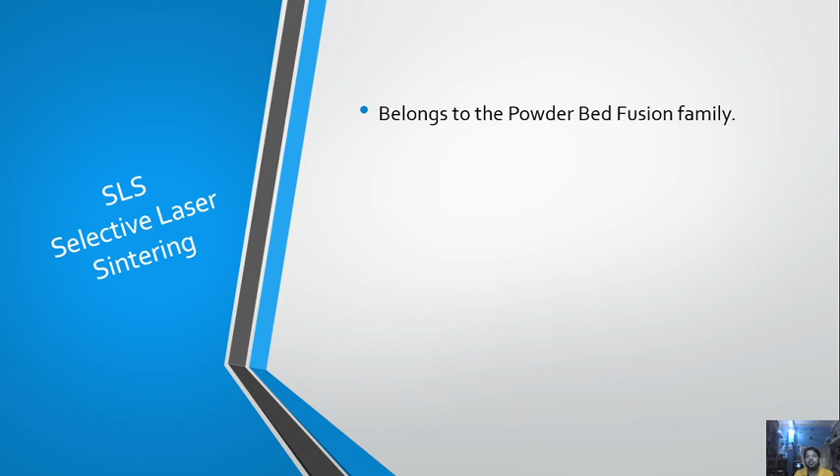So what is selective laser sintering, or SLS? Basically, selective laser sintering is an additive manufacturing process that belongs to the powder bed fusion family. In SLS, a laser selectively sinters the particles of a polymer powder, fusing them together and building a part layer by layer. The materials used are thermoplastic polymers that come in granular form.

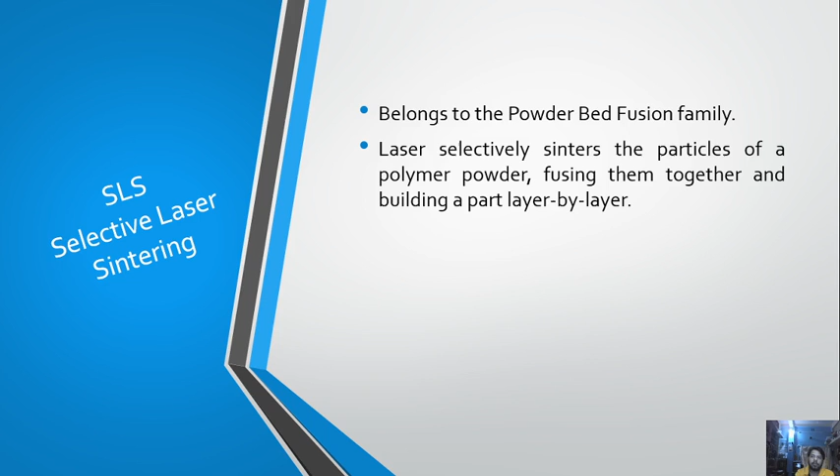SLS 3D printing is used for both prototyping of functional polymer components and for small production runs, as it offers high design freedom, high accuracy, and produces parts with good and consistent mechanical properties, unlike FDM or stereolithography. The capabilities of the technology can be used to its fullest only when the designer considers its key benefits and limitations.

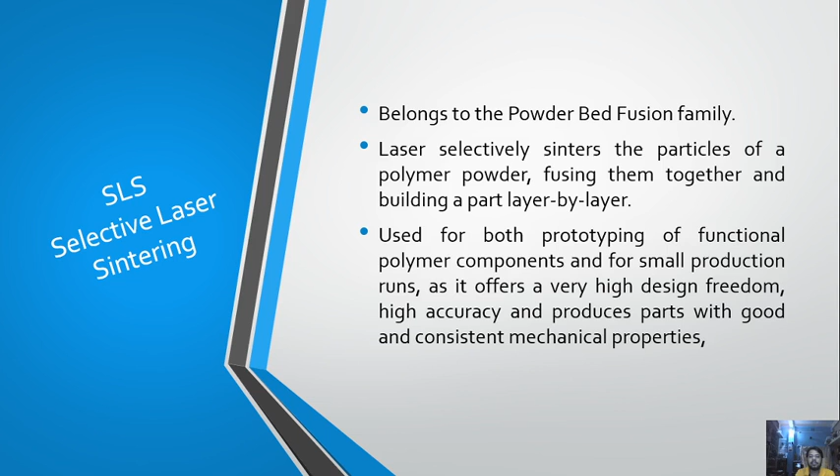So now let's see how a selective laser sintering 3D printer works. You can see in this video how an SLS 3D printer operates.

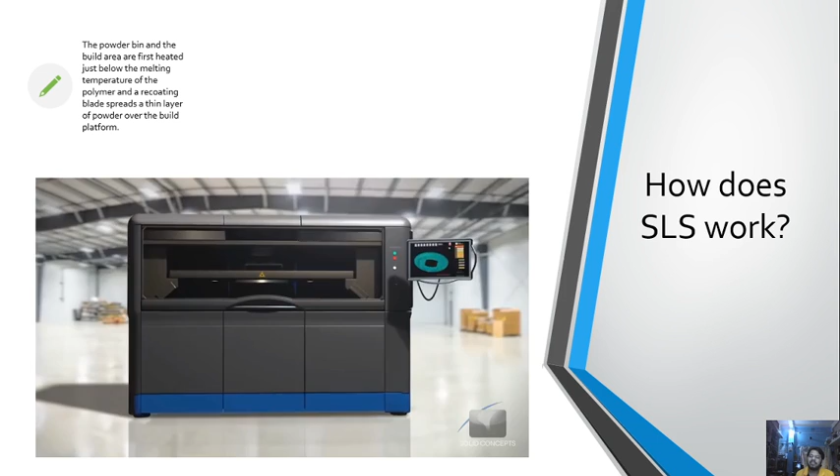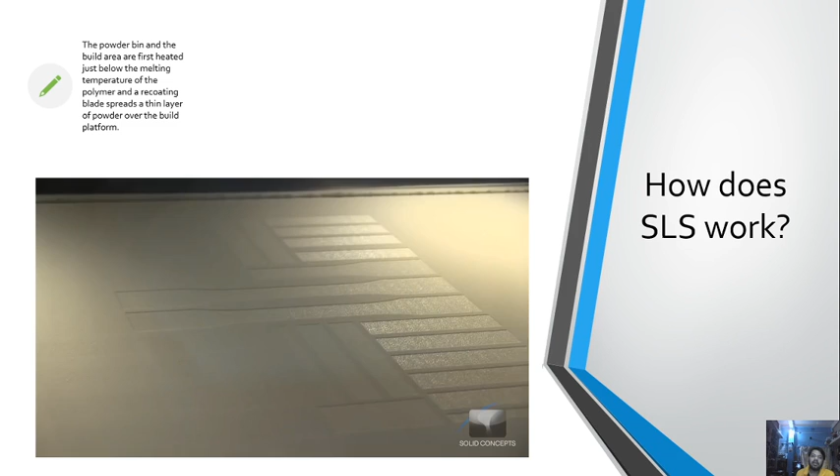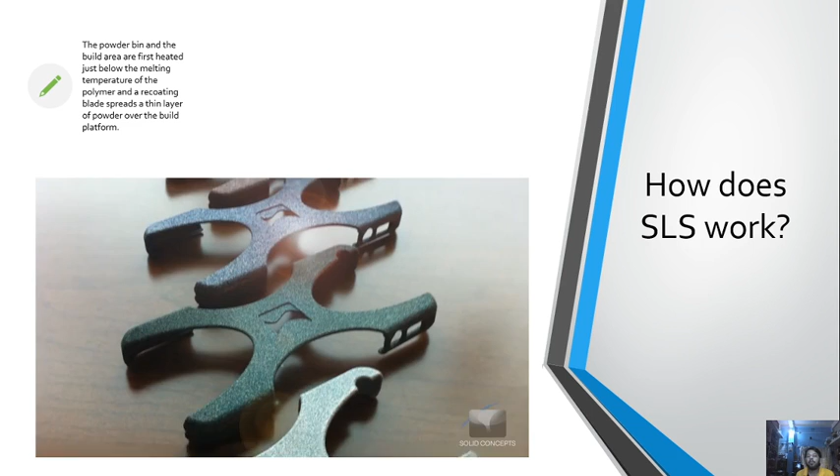At first, the powder bin and the build area are heated just below the melting temperature of the polymer, and a recoating blade spreads a thin layer of powder over the build platform. Then a CO2 laser scans the contour of the next layer and selectively sinters, fusing together the particles of the polymer powder. The entire cross section is scanned, so the part is built solid. When the layer is complete, the build platform moves downwards and the blade recoats the surface, and the process repeats until the whole part is complete.

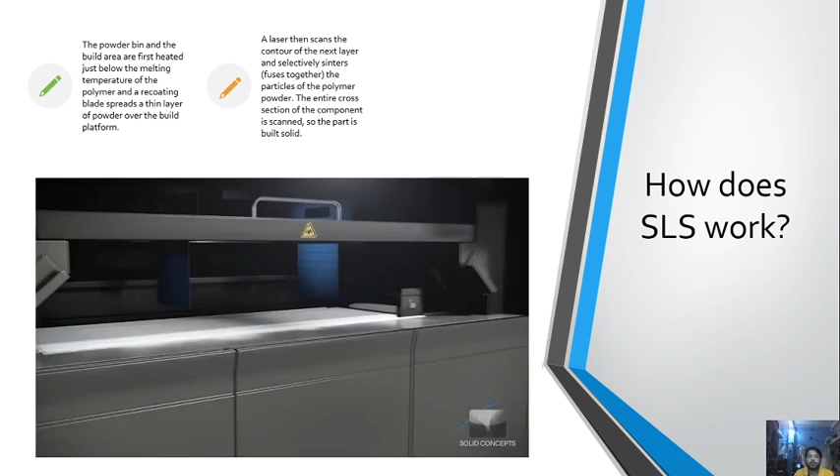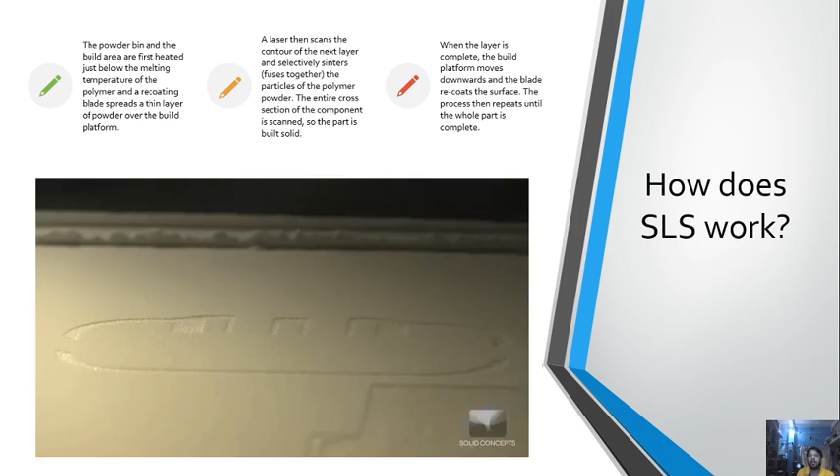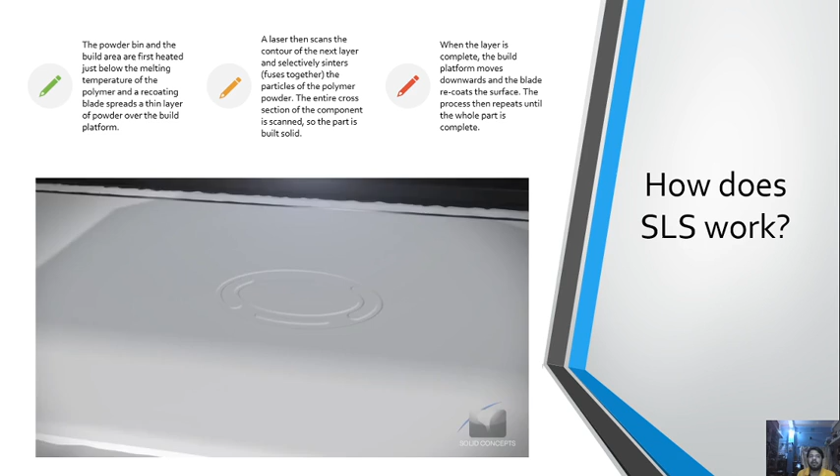After printing, the parts are fully encapsulated in unsintered powder, and the powder bin has to cool down before the parts can be unpacked. This can take a considerable amount of time, sometimes up to 12 hours. The parts are then cleaned with compressed air or other blasting media and are ready for further post-processing. The remaining unsintered powder is collected and can be reused in the next production run.

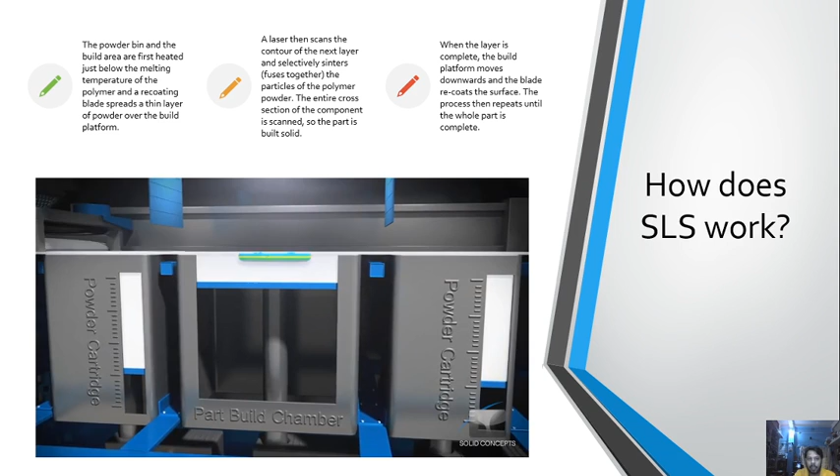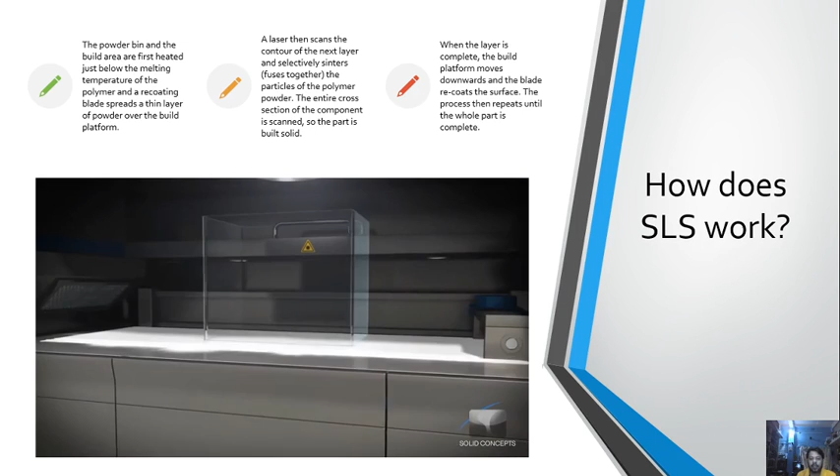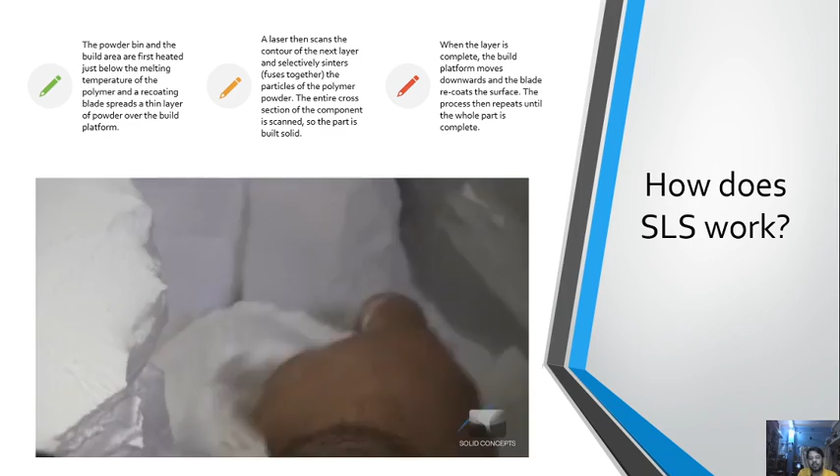So here in the video you can see how the selective laser sintering process takes place, and when the printing operation is complete, the part is collected, and then it shows how the post-processing takes place.

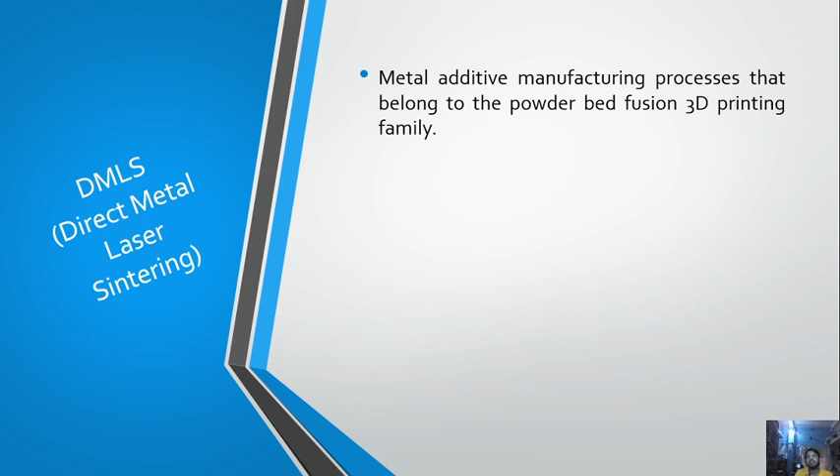Then comes direct metal laser sintering, or DMLS. Selective laser melting (SLM) and DMLS are two metal additive manufacturing processes that belong to the powder bed fusion 3D printing family. These two technologies have a lot of similarities. Both use a laser to scan and selectively fuse or melt the metal powder particles, bonding them together and building a part layer by layer. The materials used in both processes are metals that come in granular form.

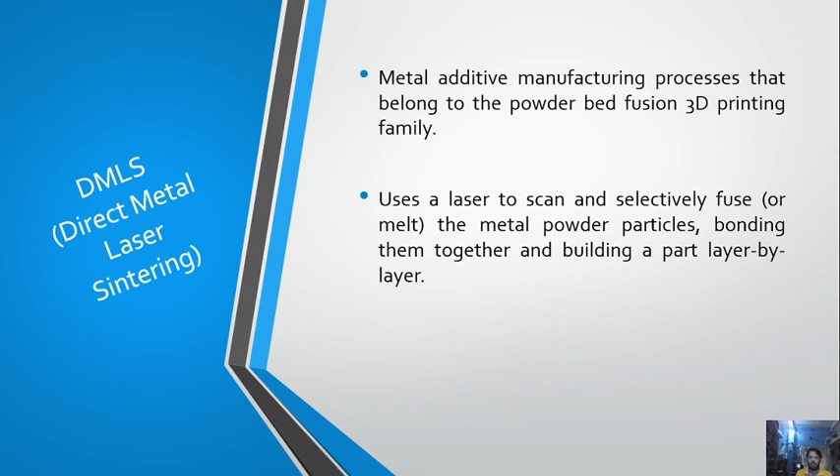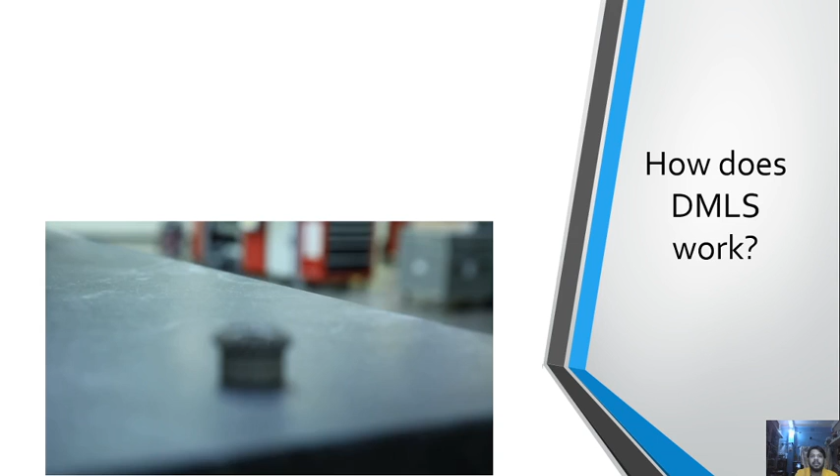So let's see how a DMLS printer works. At first, the build chamber is filled with inert gas, for example argon, to minimize oxidation of the metal powder, and then it is heated to the optimal build temperature.

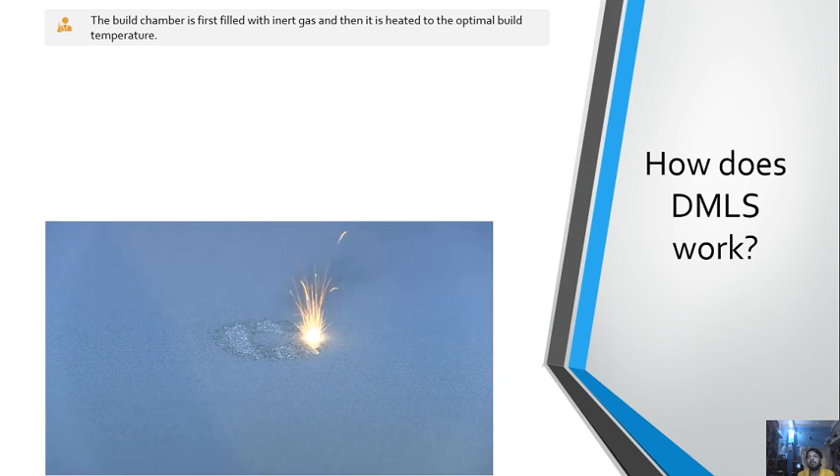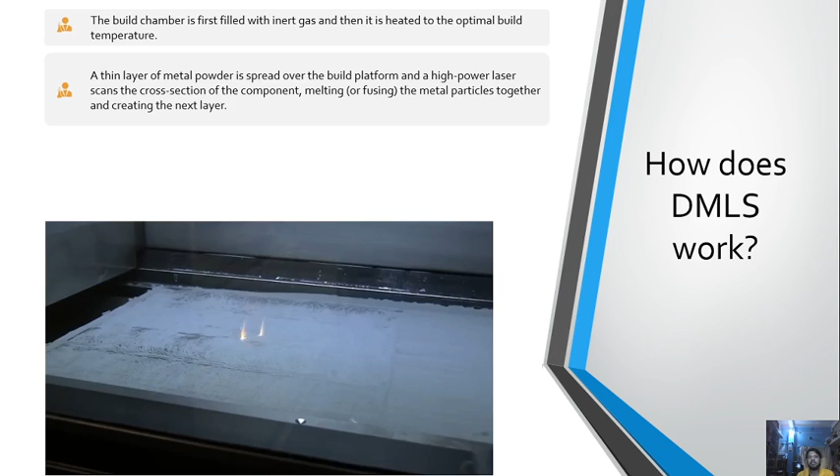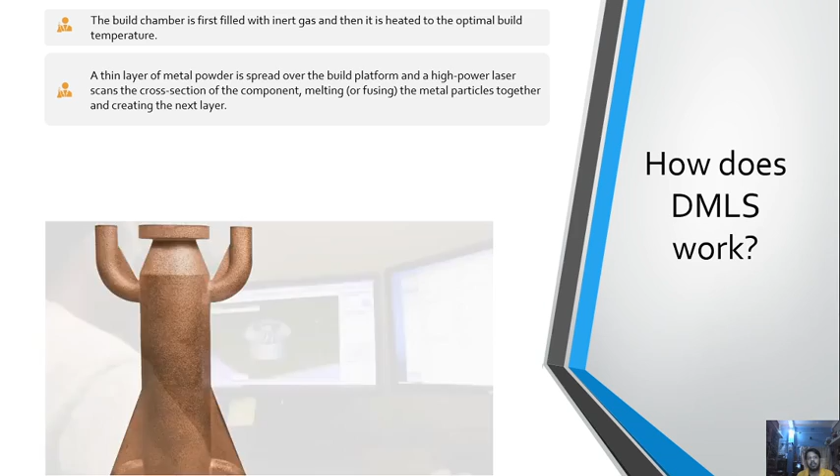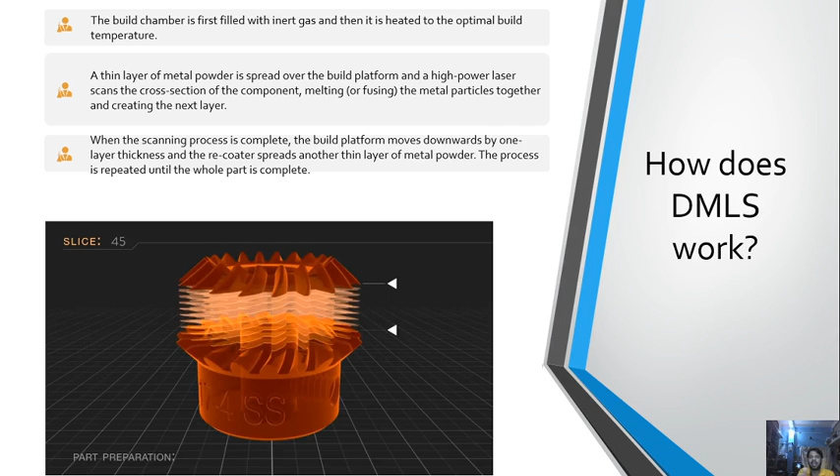Then a thin layer of metal powder is spread over the build platform, and a high power laser scans the cross section of the component, melting or fusing the metal particles together and creating the next layer. The entire area of the model is scanned, so the part is built fully solid. When the scanning process is complete, the build platform moves downwards by one layer thickness and the recoater spreads another thin layer of metal powder. The process is repeated until the whole part is complete.

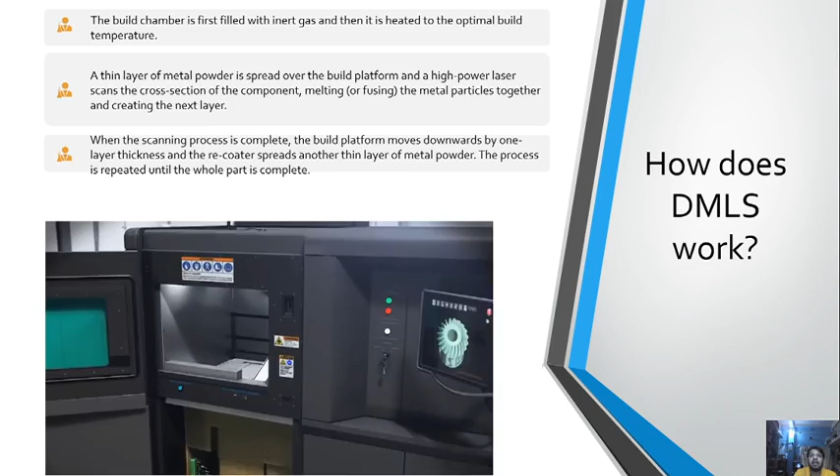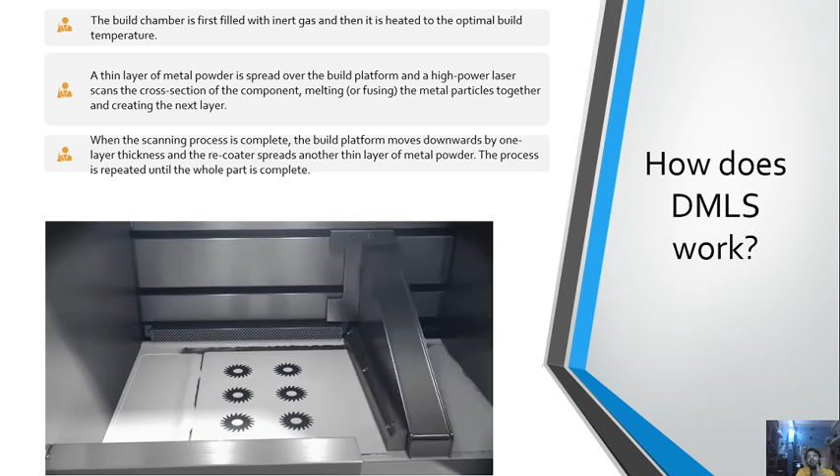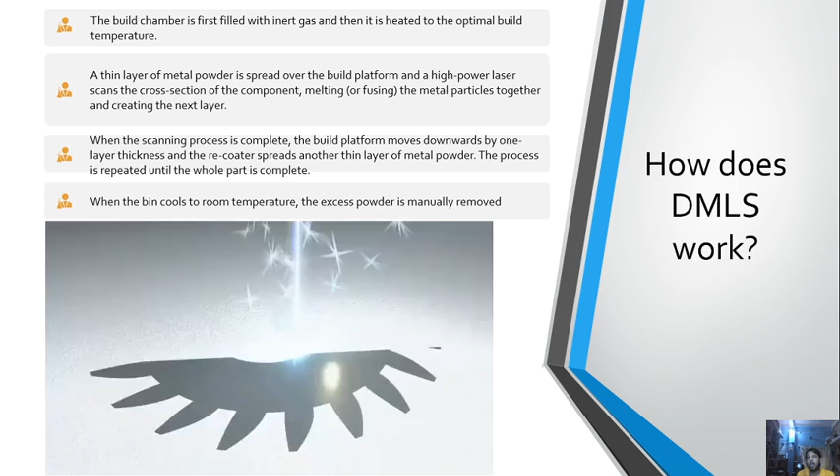When the build process is finished, the parts are fully encapsulated in metal powder. Unlike polymer powder bed fusion processes such as selective laser sintering, the parts are attached to the build platform through support structures. Support in metal 3D printing is built using the same material as the part and is always required to mitigate the warping and distortion that may occur due to high processing temperatures.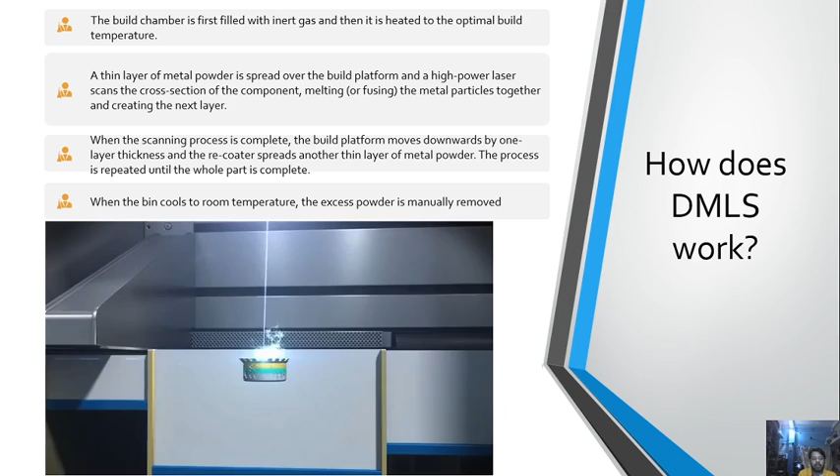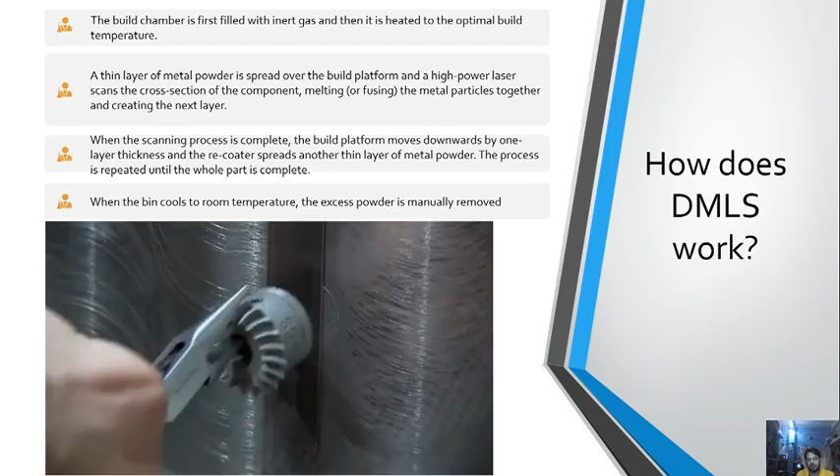So in this video you can see how a laser beam scans and uses the powder to build a layer-by-layer process, and then post-processing takes place to remove the support structures and get the finished product.

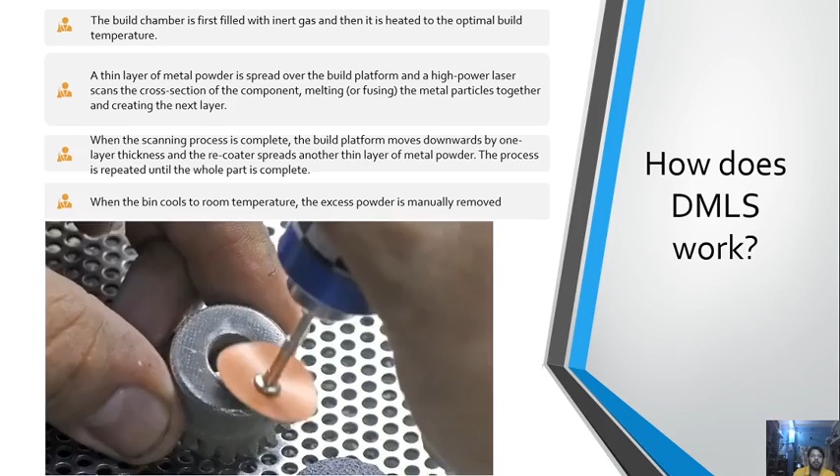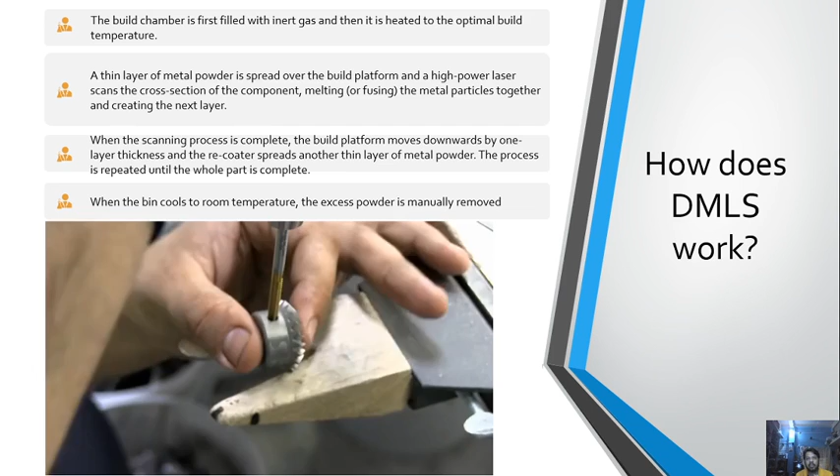When the bin cools to room temperature, the excess powder is manually removed and the parts are typically heat treated while still attached to the build platform to relieve any residual stresses. Then the components are detached from the build plate via cutting or machining and are ready for further post-processing.

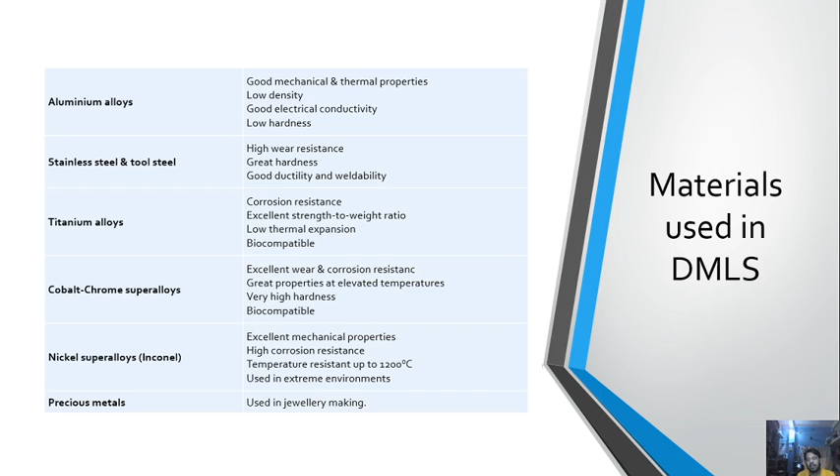So basically these are the materials that can be used in DMLS 3D printing: aluminum alloys, stainless steel, titanium alloys, cobalt chrome super alloy, nickel super alloy.

The last process is polyjet or multijet, sometimes termed 3D inkjet printing. Material jetting or polyjet printing is an additive manufacturing process similar to 2D printers. A printhead similar to standard inkjet printheads dispenses drops of a photosensitive material that solidifies under UV light, building a part layer by layer.

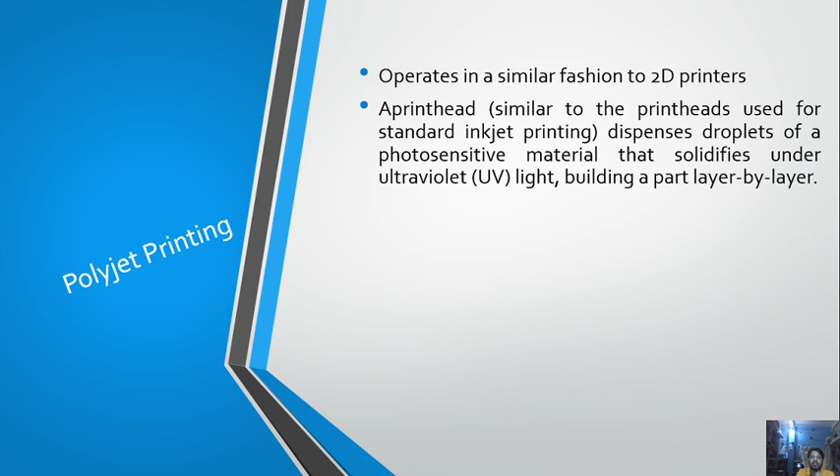The materials used in polyjet or multijet printing are thermoset photopolymers in liquid form. Material jetting 3D printing creates parts of high dimensional accuracy with a very smooth surface finish. Multi-material printing and a wide range of materials such as ABS, rubber, and fully transparent materials are available, making multijet a very attractive option for visual prototypes and tooling manufacturing.

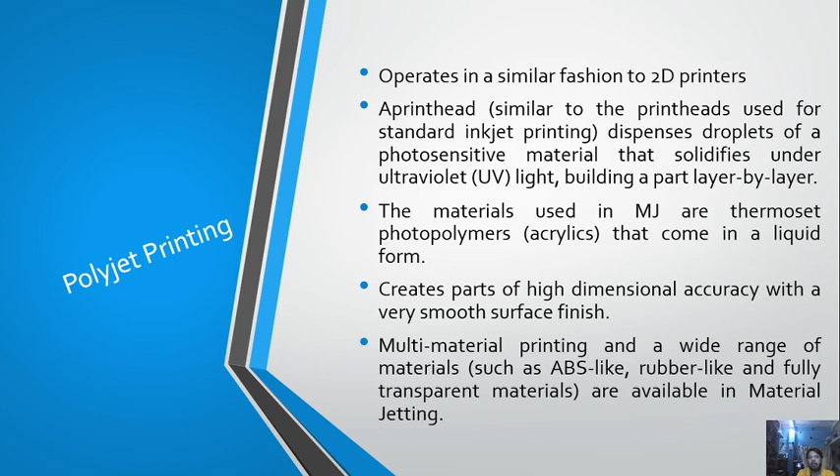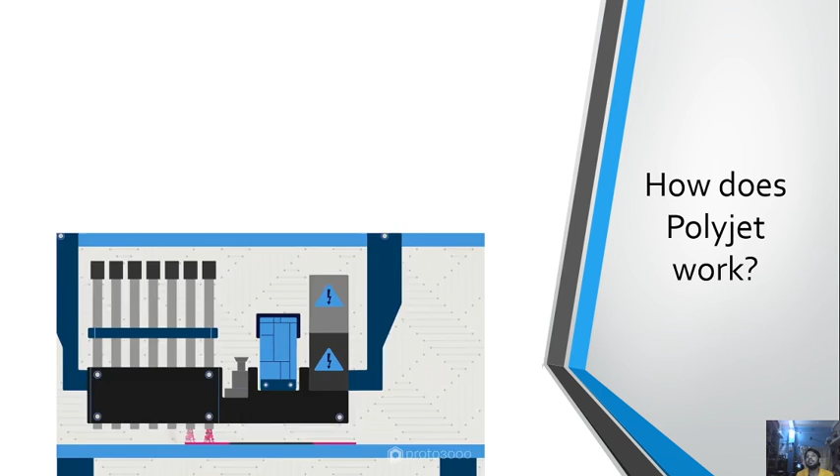Now let's see how a material jetting or polyjet printer works. In the video you can see how it works. Firstly, the liquid resin is heated to 30 to 60 degrees centigrade to achieve optimal viscosity for printing.

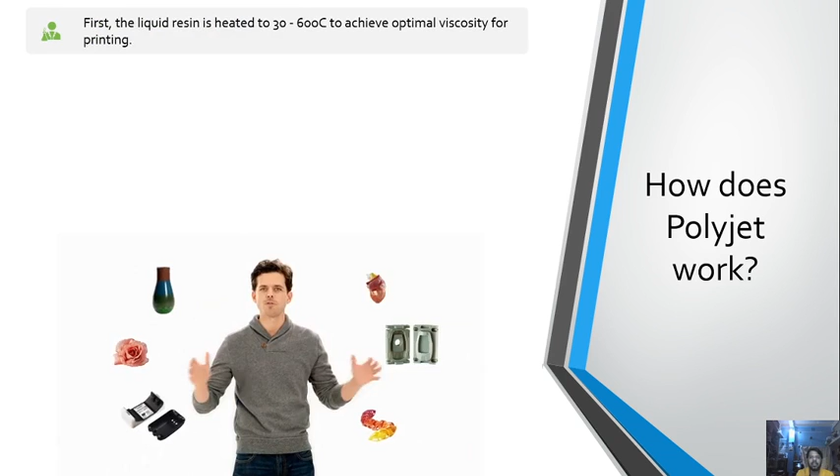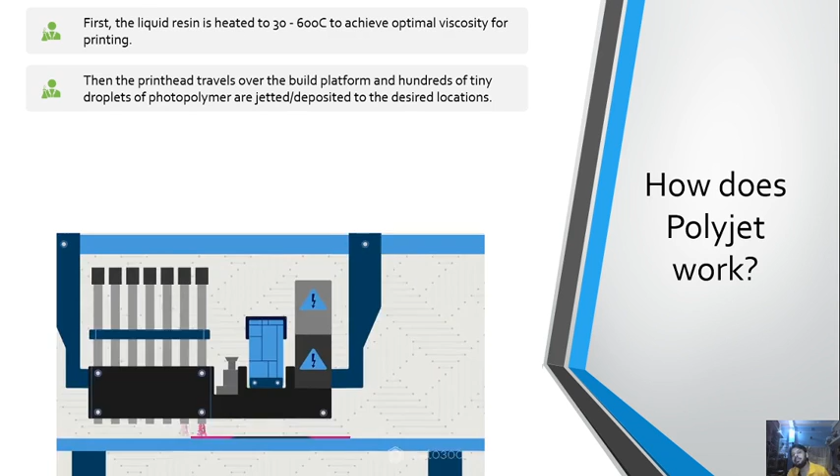Then the printhead travels over the build platform and hundreds of tiny droplets of photopolymer are jetted or deposited to the desired locations. A UV light source attached to the printhead cures the deposited material, solidifying it and creating the first layer of the part.

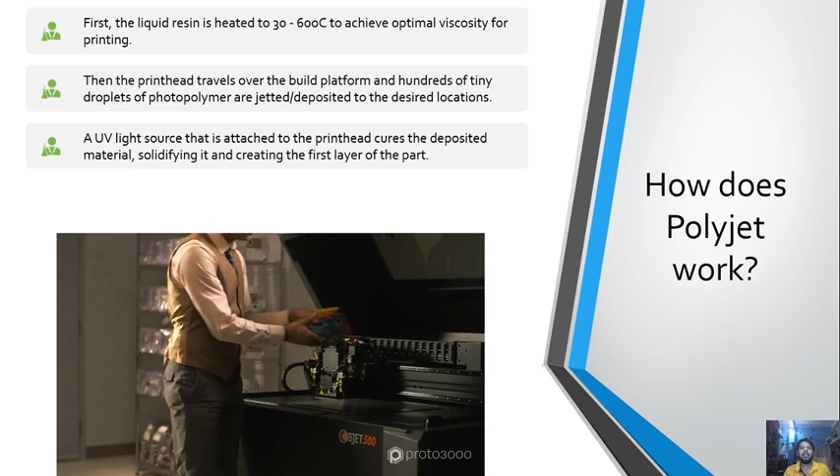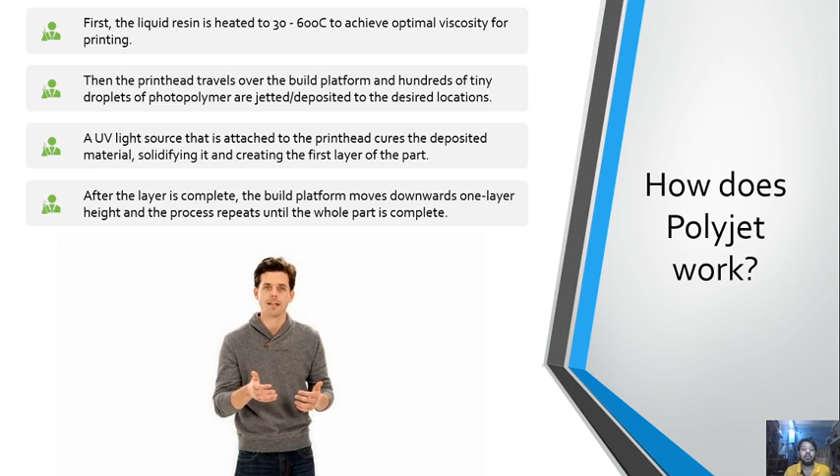After the layer is complete, the build platform moves downwards by one layer height and the process repeats until the whole part is complete. You can see in this video how in multijet or polyjet printing we can print multi-material or multi-colored parts that are ready to use after printing.

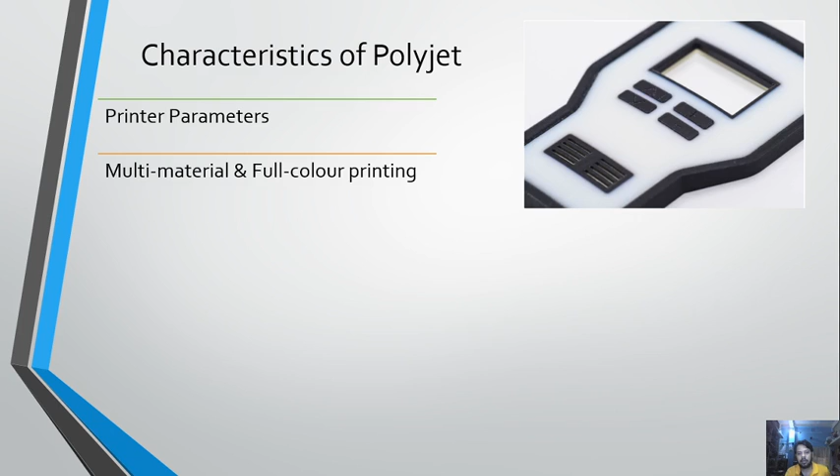There is a need for support structures in polyjet printing. The finished product may be matte or glossy, depending upon the production process used.

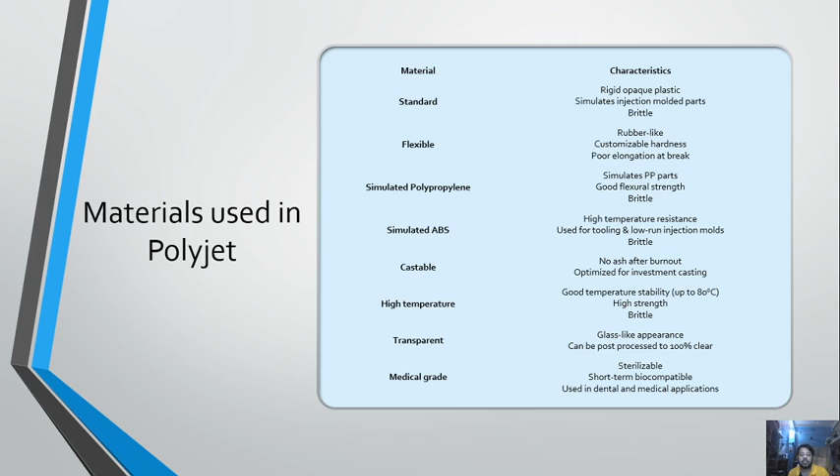So now the point comes: if we want to 3D print something, which process do we need to choose? That solely depends upon the application of the printed parts we want to print and the materials that are available to us.

I hope you have understood the total 3D printing process. In the next upcoming video I will discuss how a 3D CAD model can be converted into an STL file, and how that STL file can be converted into a G-code file with the help of slicing software, and how the parameters in the slicing software affect the quality of 3D printing.